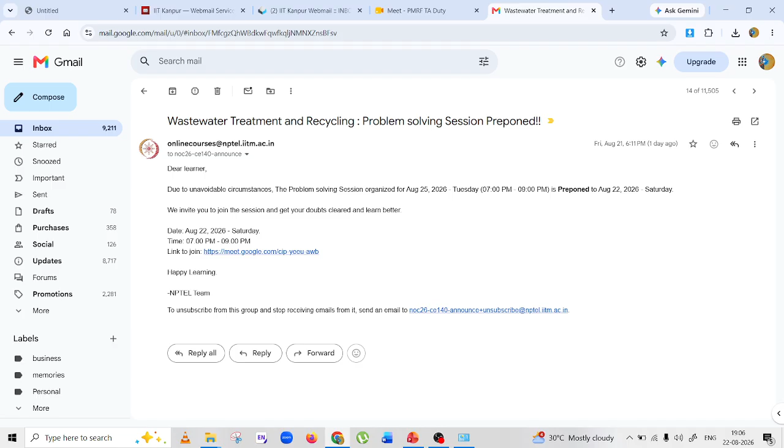Hello? Hello? Yeah, yeah, I am in the class. No, I am in the class. I am asking. There are five people, but no one is responding. I don't know why. Sorry. Just 1 minute. Oh, sorry. Just 1 minute. Oh, I was on the wrong ID. Sorry.

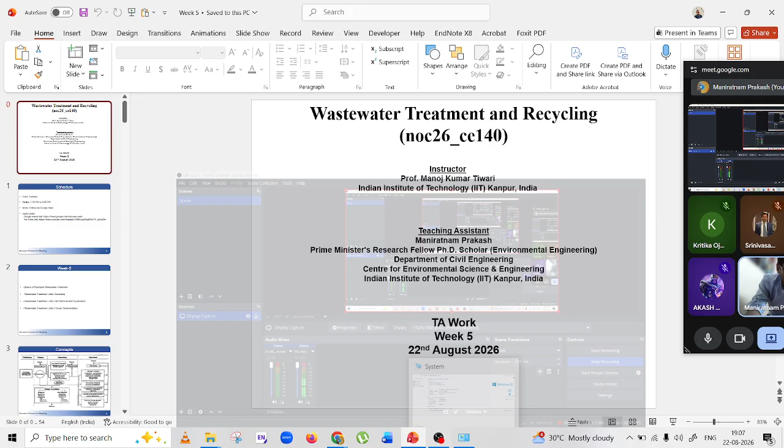Good evening, everyone. My name is Maniratnam Prakash. Welcome to the fifth session on wastewater treatment and recycling. The course instructor of this subject is Professor Manoj Kumar Tiwari.

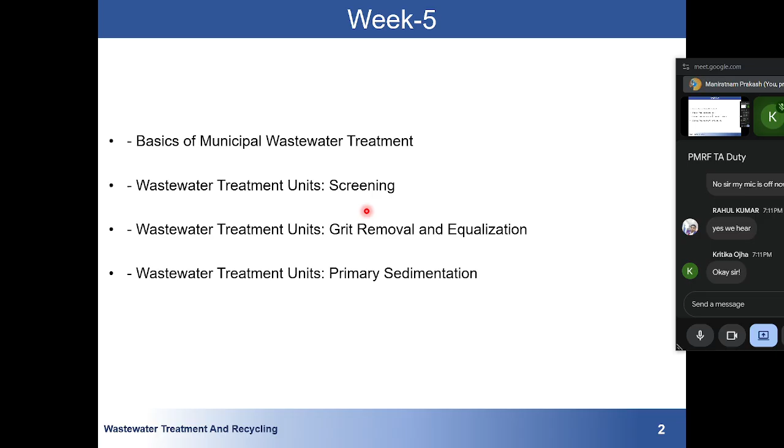So now we have some basic knowledge of what wastewater is, what kind of wastewater is generated at different locations, and what the different parameters are that we have to measure for our treatment purpose. So now we will be going into the basic treatment plant: the basic municipal wastewater treatment, then the wastewater treatment units. There are different units we will be looking into, and finally we will be looking into primary sedimentation. So this is the general treatment plan.

Okay, you can go through any book and you will find this layout of what the different treatment units are.

So first thing is that preliminary treatment. So here what we do is remove all the larger particles, because we know that our different units for treatment of wastewater have certain limitations. So the first and foremost thing they want is that there should not be any larger particles. So here we do preliminary treatment. We know that wastewater is coming from different locations, and it will contain larger rocks, boulders, or some unwanted things which are not suitable for the upcoming unit. So we have to remove it.

Then we have primary treatment unit, then secondary treatment unit, and then advanced treatment unit. Most of the treatment plants are till secondary treatment unit. Now advanced treatment unit is for some specific purpose, like if we want to treat our wastewater for drinking purpose or something else, then we go for the advanced treatment. But at most locations you will see that they go through the secondary treatment unit, and after that they discharge into a river, pond or land. We have different criteria for disposal.

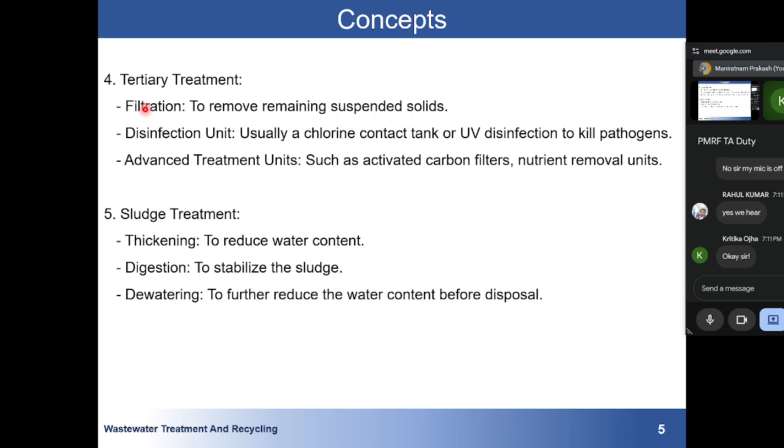We will be going through these topics in much detail in upcoming weeks, maybe week 7 or 8. We will be looking into these different treatment units, but for now I am just giving you the brief introduction of how this wastewater treatment plant works. So I think this is clear to everyone.

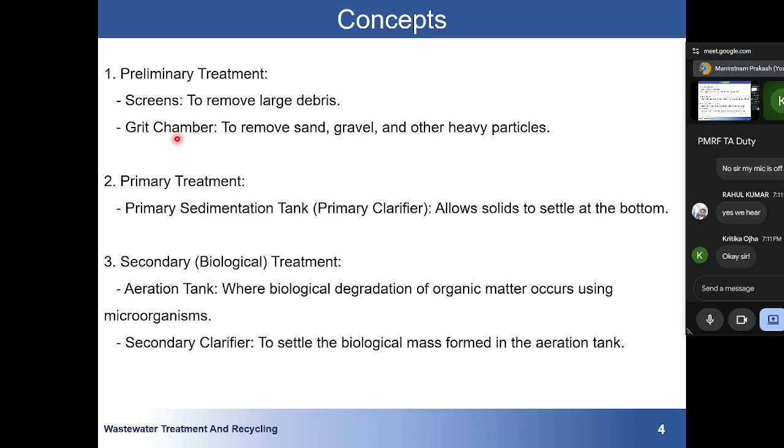So as usual, we will be going through question and answer. I will be showing some questions, and there are few people here, but I want everyone to participate, and after that we will be discussing the answer. So the first question: we have to match the treatment stages given in the first column with the target contaminants to be removed in the second column. Given the basic things we have discussed, everyone please participate and try to answer this. Please take your time. It's a very simple question.

We have got one answer, that is C. What about others, Kritika and Srinivasarao? C. Yes, C is the correct answer. Primary treatment, where we remove suspended matter. Then we have the secondary unit, where we remove dissolved organic matter, and then the tertiary unit to remove microbes, TDS, and nutrients.

Yes, this is correct. Like we have discussed, primary treatment is the first stage treatment where physical processes like screening and sedimentation are used to remove the larger particles. Then we have secondary treatment, where we remove the organic carbon, dissolved organic matter. Organic matter will mostly be in carbon and nitrogen form, so we have to remove it. This stage significantly reduces the biochemical oxygen demand and organic pollutants in the wastewater. In upcoming weeks we will also be reading how these treatment units work.

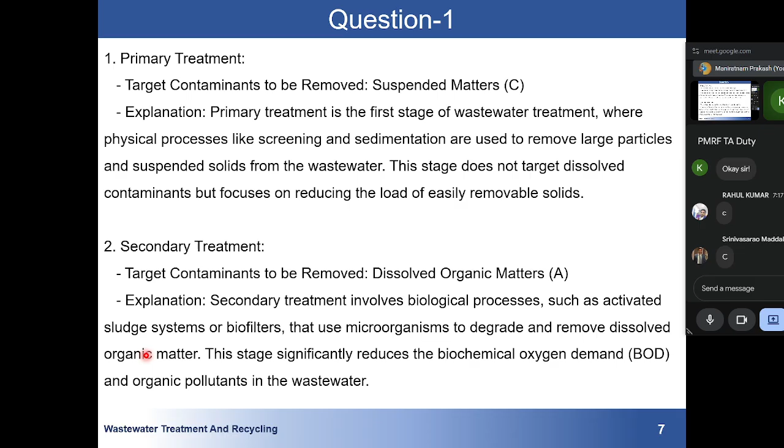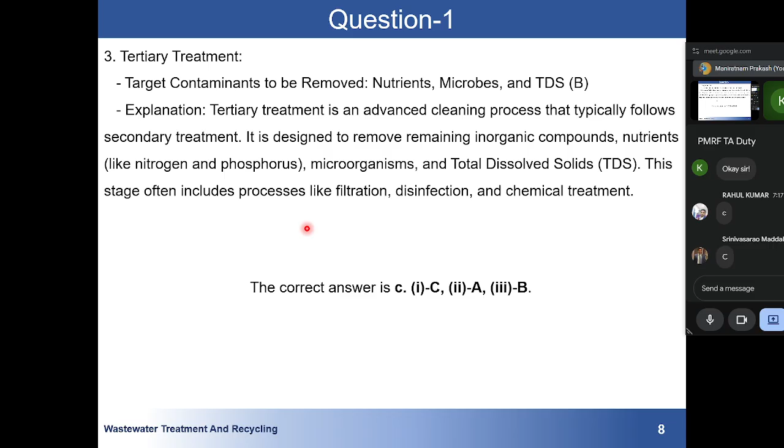Then finally we have tertiary treatment to remove nutrients and microbes. Tertiary treatment is an advanced cleaning process that typically follows secondary treatment, and it is designed to remove the remaining inorganic compounds, nutrients such as nitrogen and phosphorus, microorganisms, and total dissolved solids. This stage often includes processes like filtration, disinfection, and chemical treatment. I hope this is clear to you.

Coming to the second question: which of the given treatment stages is not included in the preliminary treatment of wastewater?

Not included. A. So oil and greases, just by skimming tanks. Okay, well, I have got one answer, A. What about others? They are asking "not part of." I don't know, just read it. Not included. Not included in the preliminary treatment.

So I don't know why you said A. B is the correct answer. Yeah, B is the correct answer. We will look at it. So the preliminary treatment of the wastewater is the first step in the treatment process, focusing on removing larger and easily separable contaminants to prevent damage or clogging of the subsequent treatment units. It typically includes the following.

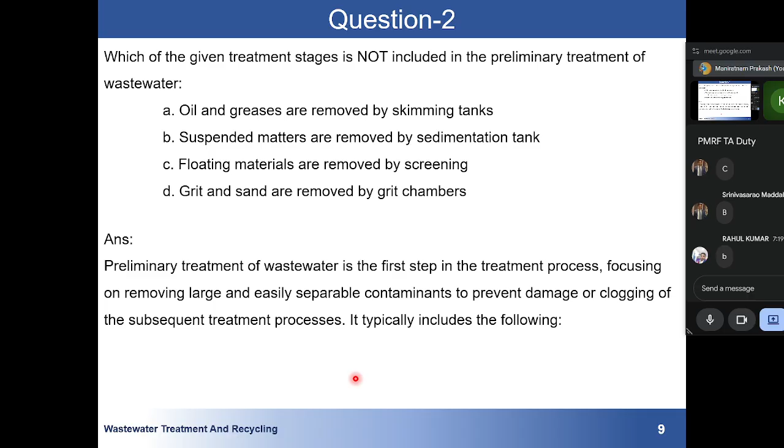So I think I have not added the part. So first, oil and grease removal is a part of it. They were asking not included in the preliminary. So oil and grease are removed in the preliminary treatment, whereas skimming tanks are there to remove oil. If you search on the internet for wastewater treatment, they will show you each and every part, like how oil is removed, how suspended matter is removed.

So there is a roller type of thing. They will remove this thing, and there is a skimming tank that removes the oil and grease also. So generally, if the wastewater coming in contains some oil, the oil will be floating on the wastewater, because due to density difference it will be lying above the water. So they remove it with the help of a skimming tank. Floating materials are removed by screening, which is a part of preliminary treatment. Grit and sand are removed by grit chambers, which are used to remove heavy inorganic particles like sand and gravel during preliminary treatment.

Secondary treatment involves the removal of finer suspended matter. So the correct answer is B. Suspended matter is removed by sedimentation. So secondary treatment involves the removal of finer suspended matter and everything. Okay, so we will be looking into what this secondary treatment unit is. But before that, coming to the third question. I hope this is clear to Kritika. You have already said okay, sir. So if anyone has any other doubt, they can ask, or let's solve the third question.

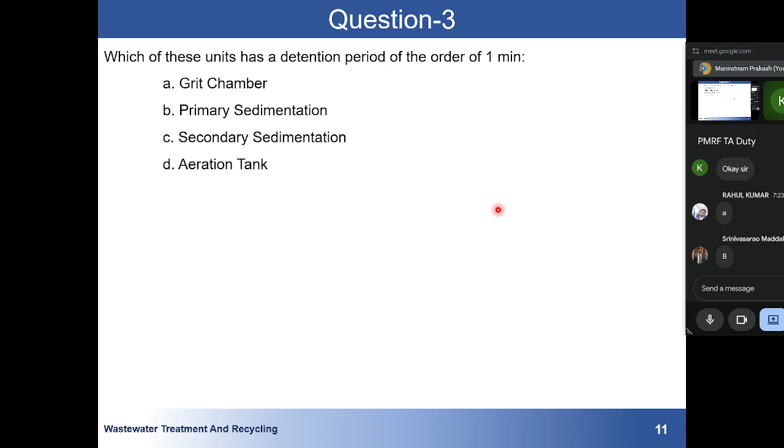You don't have to go into details. You can take some water and just keep it. It will contain some suspended particles, and we know it won't settle on its own, so we have to add some chemicals also. So it will take more than 1 minute, so B cannot be the answer. The correct answer is A, grit chamber. The detention period of the grit chamber is around 1 to 5 minutes. Grit chambers are designed to remove heavy inorganic particles like sand, gravel, or other small dense particles from the wastewater. The short detention allows these heavier particles to settle while lighter organic matter remains in suspension.

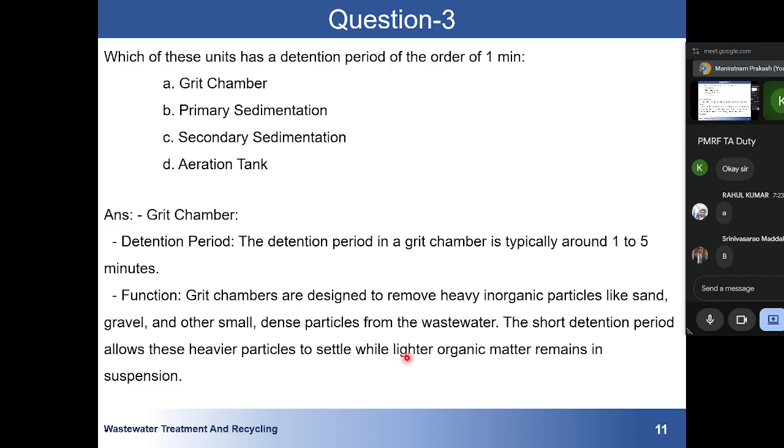So I hope this is clear to those who were saying B, primary sedimentation. Here it takes around 1.5 to 2.5 hours. The process allows suspended solids to settle because we add chemicals and many things. Then secondary sedimentation also takes around 2 to 4 hours. The process is designed to remove biological sludge solids that are formed during secondary treatment. And the aeration tank provides oxygen to your wastewater so that oxidation can happen. It usually takes 4 to 8 hours. So the correct answer is A. I hope this is clear to you.

Srinivasarao, you were saying B. I hope this is clear to you. The correct answer will be A.

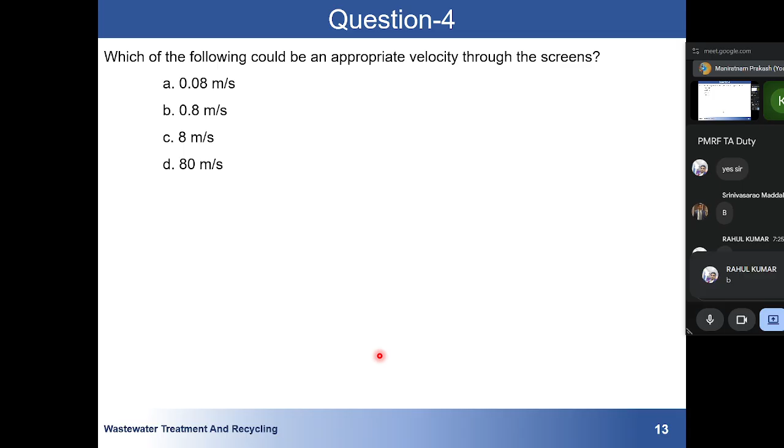Which of the following could be the appropriate velocity through the screens? This is information like, when we design our screening, we have to fix that this much velocity should be there, 0.8 meter per second. B, yeah, B is the correct answer, 0.8 meter per second.

So the appropriate velocity through the screen typically depends upon the specific application and design requirement. Based on the provided search results, the commonly accepted velocity through the screen is recommended to be around 0.8 meter per second. The value is supported by various engineering guidelines. So the purpose is that there will be a screen, a screening.

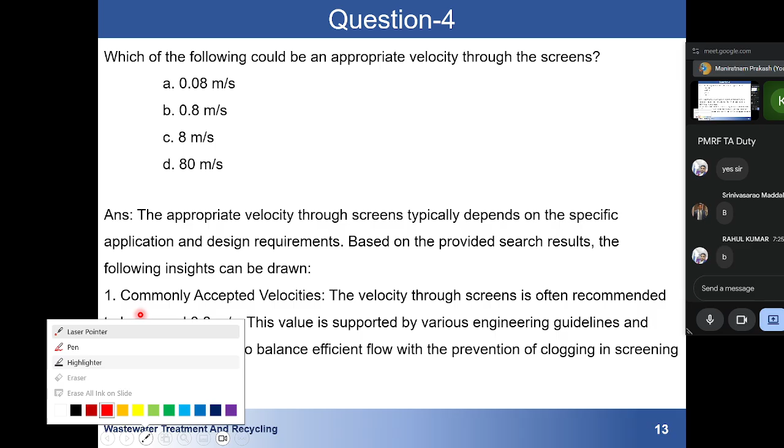So how does your screening look like? Like this. Okay, and the water flows in this direction. Okay, and what happens is that this also keeps rotating. So you will find in older versions there is manual scraping. In older wastewater treatment, you will see something like a net structure the water will be passing through.

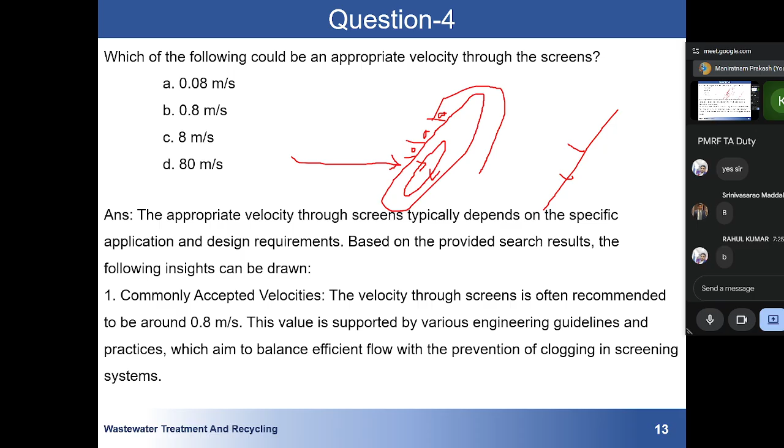But currently people are using a belt-like structure which contains a stair-like arrangement. Water will be coming, and if some debris is there, it will settle down here, and when it comes to this side, it will be thrown and collected at some point, and the water will pass. So this arrangement is made. I hope everyone has seen how a screen chamber looks.

There is also a concept of self cleansing; a self cleansing velocity is important to prevent sedimentation. The minimum recommended effective self cleansing velocity is generally 0.3 to 0.8 meter per second. Values above this help the solids not settle down. So we also maintain this.

If the velocity is very low, suspended solids will start depositing on the bed of the unit and it will clog. If the water is moving in this direction, we want all the suspended particles to also move in this direction. If the velocity is very high, there might be chances that the larger particles will keep flowing with it. Okay, I hope this was clear to you.

Coming to the next question, question number 5, the equalization tank. Answer this question. We have got one answer, D. Question number 5, answer is D, all of the above. Everyone is saying yeah, it's correct. The correct answer is D. An equalization tank is typically a storage tank. I hope everyone understands.

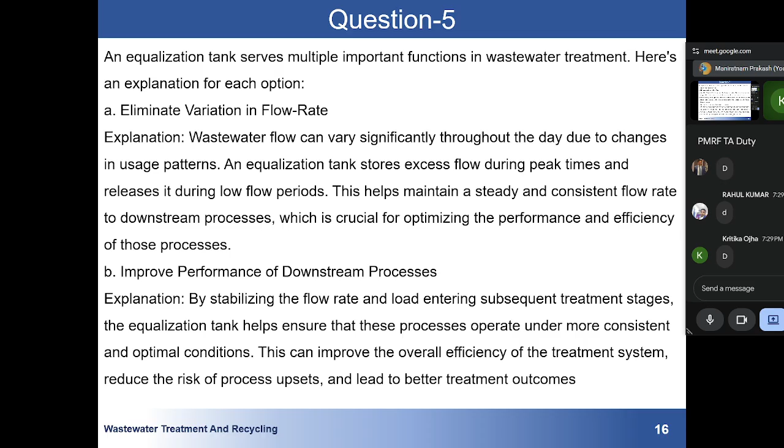And last, fluctuating concentration. The concentration of pollutants in the wastewater can fluctuate due to varying sources, and the equalization tank mixes the influent to average out this fluctuation, providing a uniform composition. So suppose one water contains a very high amount of BOD, another contains a small amount of BOD. In the equalization tank, everything will mix and we will get an equilibrium BOD. That will help us to design our treatment unit. I hope this is clear to you.

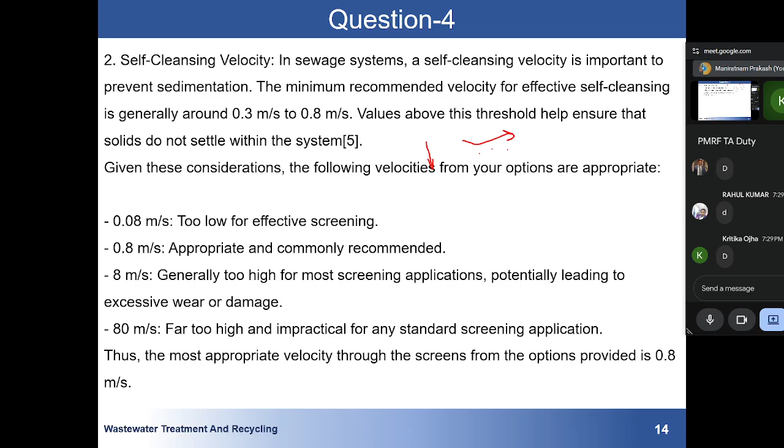Sir, equalization tank, where is it located, sir? Is it prior to the grit chamber, or where is it located exactly? Just 1 minute. This I think I am also not aware, but let me check. I think it will be written here.

So generally it is after this, between preliminary treatment and primary treatment. Now it also depends upon the design, how someone has designed it. But in general, I have just searched on the internet. First they remove all the larger particles and boulders in the screening and grit chamber. Then the water will go through the equalization tank. So it is here, after the screening. So here you will get this equalization tank.

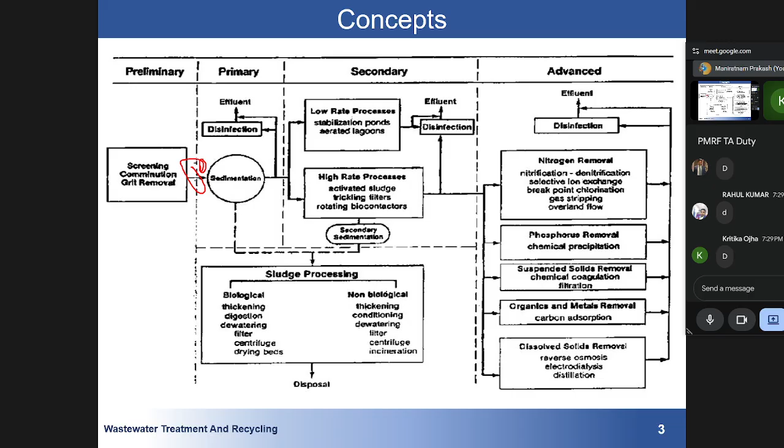I think I have a diagram also. Just 1 minute. So here you can see this is our primary treatment unit. Before that we will have the equalization tank. Here the water will be coming at a uniform flow rate and it will go to this tank. I hope this is clear to you. Okay, sir.

So the correct answer was D. Now before going to the next question, I want to discuss something about sedimentation. I will take around 5 to 10 minutes to discuss the terms and some formulas that people generally use, and we will be using these formulas to solve some upcoming questions.

In general, sedimentation is the process in which suspended solids are allowed to settle naturally by the action of gravity. There will be no pressure or anything, just water, and it will settle down just by the action of gravity. That is known as sedimentation. There are different types of sedimentation: type 1 settling, type 2 settling, type 3 settling.

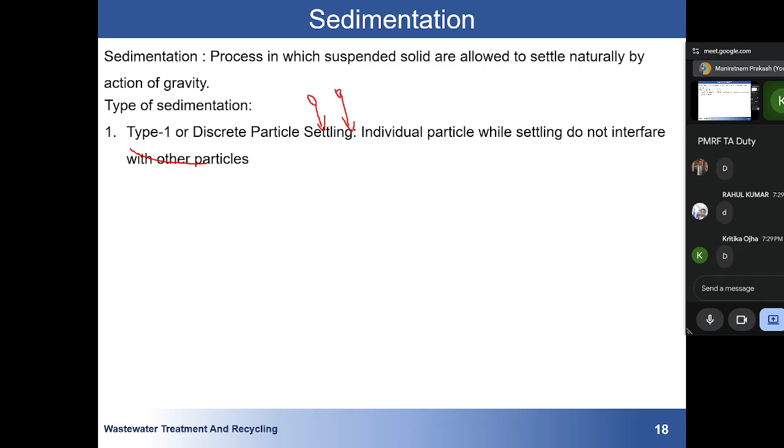Type 1 settling is where individual particles while settling do not interfere with other particles. If you take water and see one particle settling and another particle settling, they are not interfering with each other. Each will settle on its own, not disturbing anyone. This is known as type 1 or discrete particle settling. The most common ones people generally use are type 1 and type 2. Now if we talk about the second, type 2.

Enhanced settling involves adding chemicals like coagulants and flocculants to promote the aggregation of particles into larger flocs. These larger particles settle more rapidly than the individual small particles, improving the efficiency of the settling process. Imagine that in your water some larger particles have settled. Now there are smaller particles which won't settle on their own, but you have added chemicals known as coagulants or flocculants. There will be a change in chemistry, and these will combine together to form a larger particle.

And by that, if they have formed the larger particles, they will have some weight, and by the action of gravity they will settle. So that's why it is known as type 2 settling.

Then we have another process, that is hindered settling, or type 3 or zone settling. Hindered settling, in which the particles in the group slow each other down as they fall through a liquid, making the process of settling take longer than it would if the particle were alone. So it's like particles in a group slow each other.

The name itself suggests that initially you will see that there is settling, but after some time you will see that the settling has not stopped, but it has slowed down. So that is known as hindered settling.

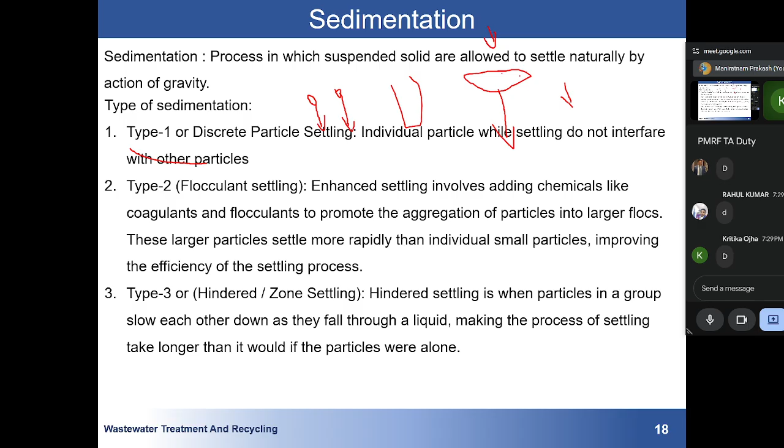And finally, type 4 is the compression settling, the mechanism of settling by forcing out the water from the solid due to the compressive force of solid on the top. So imagine that in your particles you will have larger particles and smaller solid particles.

So when it is coming down, it will also be compressing the smaller particles, and overall they will settle as one after some time. So this is known as type 4 settling. Each settling happens at a different unit we will be looking at.

First you should know the definition. Second, you should know where each type of settling happens: type 1, type 2, type 3, and type 4. Type 1, which I will discuss in the upcoming slide, happens in the sedimentation tank. Type 2 happens in the coagulation tank.

Type 3 and 4 happen during advanced treatment units, when we are generally doing the organic treatment. I have some doubt with 3, but type 4 I am sure happens when we do biological treatment. I hope this slide was clear and everyone will remember this. This is a very general question that people ask in Viva.

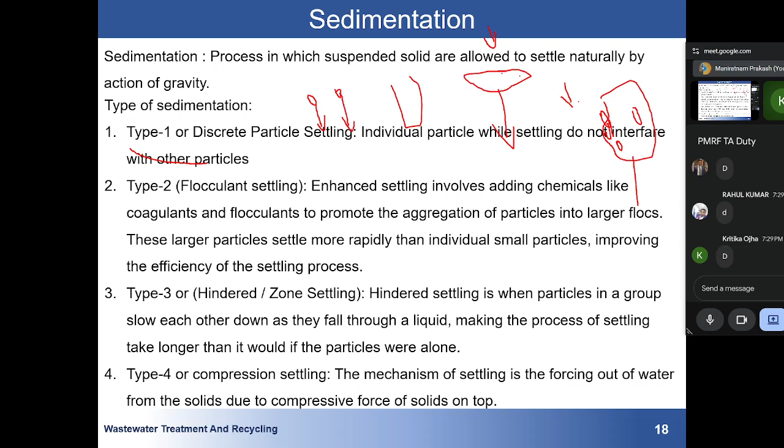Now I'm coming to the important part: settling velocity. When we talk about settling velocity, we are generally talking about type 1 settling. I have not written it, but assume this is for type 1 settling. Here we have taken one discrete particle and have not considered other particles.

Imagine that there is a particle in your water flowing with some velocity. It will have its own weight, W. Then it will have some buoyancy force, and as it is falling, it will have some drag force due to the water. I hope this is clear to you.

The weight of the particle will be volume into its density. We know that density is mass by volume. The assumption, which I have not written here, is that we consider the particle as spherical, of uniform weight, and not hindered by other particles. You can read this in the PPT or any book.

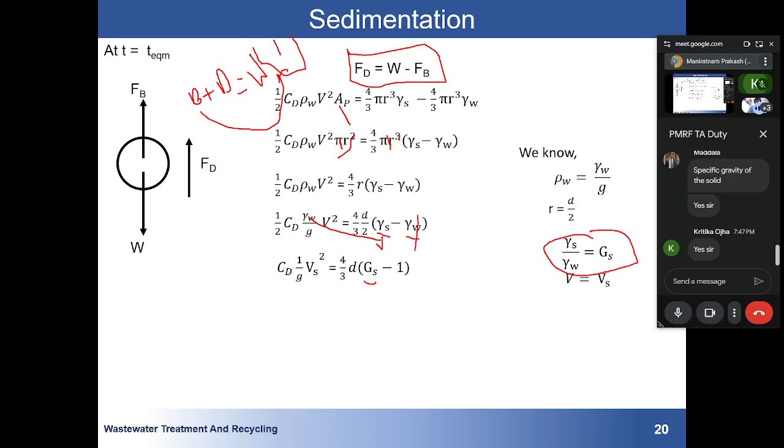So now what we have done is we have taken out this gamma w on this side. So this will be converting into one, and this gamma s by gamma w we can write as Gs. And we also know that the velocity at which it is coming down will be the settling velocity, that is Vs. So now we have put down each value.

Now we will take g to this side, we will take CD at the bottom, then finally the settling velocity formula we will get is 4 by 3 into g into d into Gs minus 1 by CD. So this is like a general formula.

If you are in your BTech or somewhere, this derivation will be asked of you. And if you are appearing for some written examination, there also they will ask this derivation. Anyone can ask. So now we know that Vs is equal to 4 by 3 into gd into Gs minus 1.

So now there is a concept that the flow of the water in which the settling happens can be of very different types. It can be laminar flow, it can be faster flow, which is known as transition flow, and then we have turbulent flow. So depending upon the type, we have something called Reynolds number.

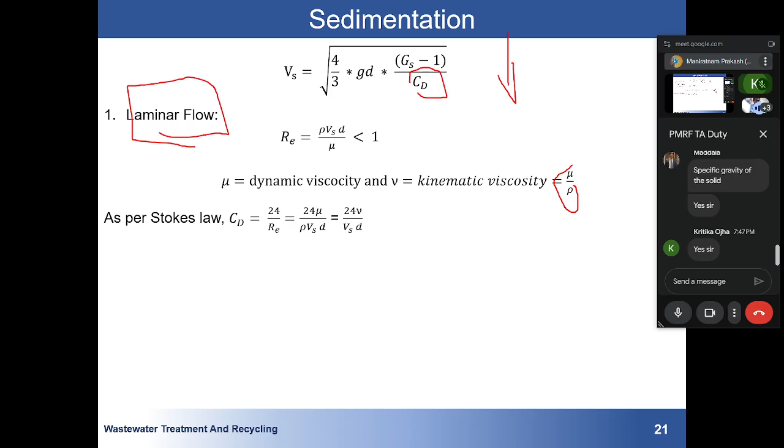Now, you won't be given the velocity, you will calculate it using this formula. Let me derive first, then I will tell you why it is important. Just remember this, the formula of Cd depends upon the type of flow. Suppose if your flow is laminar flow, then Cd is defined as 24 by Reynolds number.

And we know that Re is equal to rho Vs d by mu. So this is mu, and you can either represent it in the dynamic viscosity or you can represent it in the kinematic viscosity. So what will happen is that we will be putting this value of Cd here, 24 by Re.

If you derive it, you will get Vs is equal to g d square into (Gs minus 1). You don't have to memorize it, but you should know how to derive it. If you are preparing for GATE examination, you should memorize this formula: when the condition is laminar flow, the velocity formula is g d square into (Gs minus 1) divided by 18 into kinematic viscosity. I think it is nu.

Okay. Is this clear to you? So this was laminar flow, when the Reynolds number is less than one. But now imagine a transition flow, where the Reynolds number is greater than or equal to one and less than 1,000, then you have to use this formula.

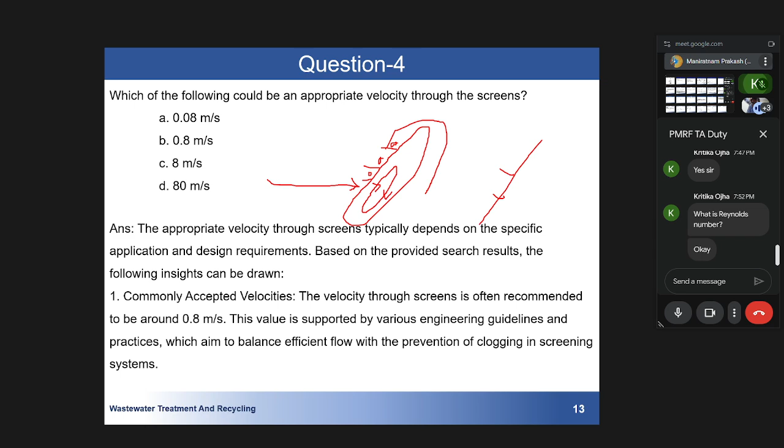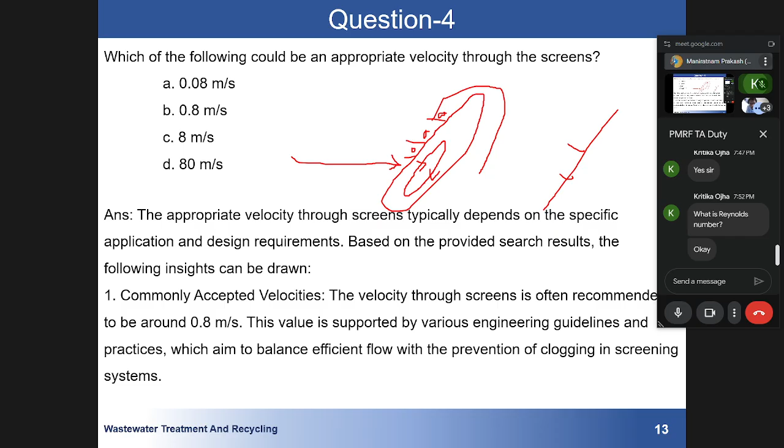This also helps us to define our self-cleansing velocity, and it is generally 0.8. There was one question about what should be the minimum velocity; 0.8 meter per second we discussed. So this velocity was determined by using that formula only. This formula helps us make sure that whatever suspended particle is there keeps moving and only settles at its designated place. Generally if you solve any question, this value will be given to you.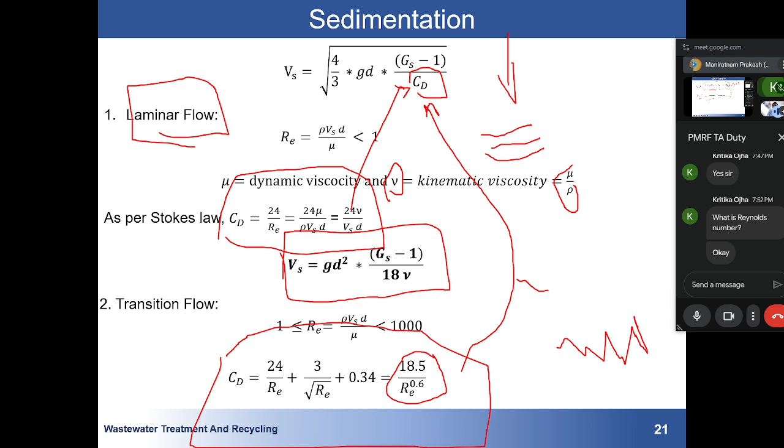But in general, G is taken as 2.65, capital G, that is the specific gravity of the particle. Then acceleration due to gravity is 9.8, and rho p or rho w, from here we can identify. And the viscosity, remember, this is kinematic viscosity. Do not get confused. Dynamic viscosity and kinematic viscosity both have different units. So remember the unit of this viscosity.

1.01. I think in 2021 when I was appearing in the GATE examination, or somewhere, they asked the unit of this kinematic viscosity or dynamic viscosity. So everyone, please make sure that you know the unit. If somebody is appearing for GATE or JAM, this kind of question is generally asked. So I hope this is clear to you.

Any doubt here? Whatever derivation, I have tried my best to explain in a very simple way, and I hope you have understood it. If anyone has any doubt. What sort of questions? October 18th, there is an online exam, sir. What sort of questions will be coming?

So every year the practice is that they ask similar types of questions to those in your assignment. There will be some theoretical questions and some numerical questions. In theoretical questions you will have multiple choice or single choice questions, and in numerical questions generally you have to fill something in. There will be some sets of questions with a single 2-3 liner question, and then you have to answer 4-5 questions depending upon the given information.

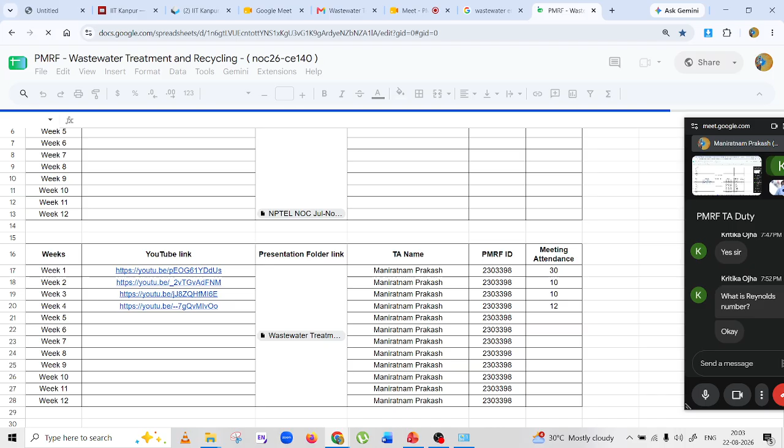Why it's not opening? Just 1 minute.

For practice purpose, you can go through that book, and I'm also showing you two more books. I have uploaded the PDF of that book in my folder.

I don't know why. Oh, somehow my laptop has gotten bad. I don't know what's happening for the last 2 days.

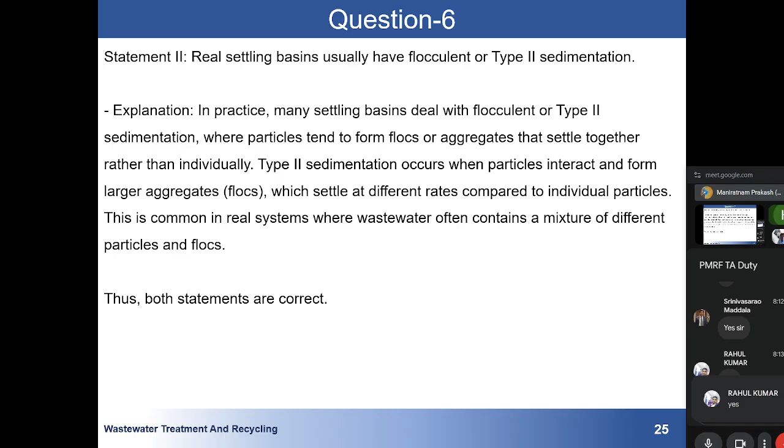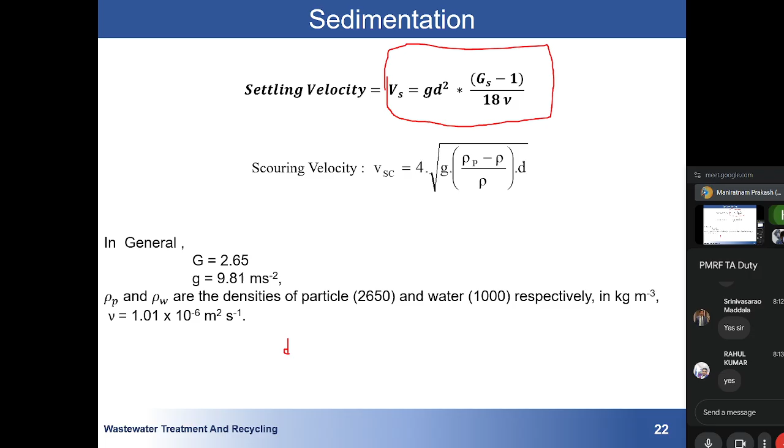So they will give you this information: capital G, small g, and then viscosity, everything will be given to you. Then you will be asked to find out the settling velocity. Density will also be given, and the diameter of the particle. So you will find out the settling velocity. Now, if you have used this formula, you have assumed that your flow was laminar flow. So whatever Vs you have got, you have to put it.

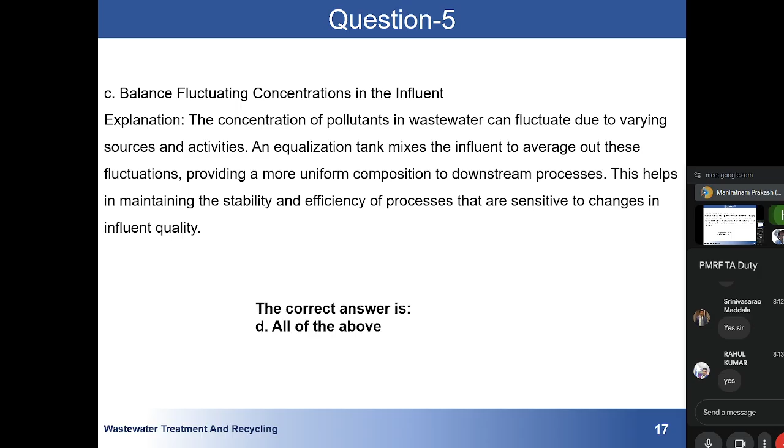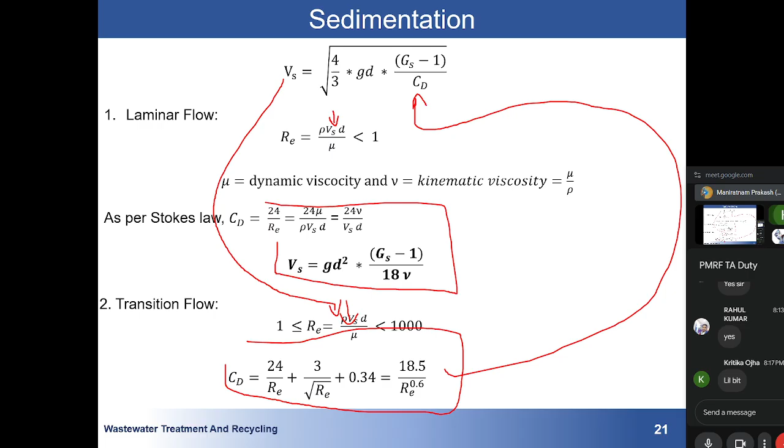I don't know whether I have a question or not, but I will try to get some. I will show you something at the end of the session. I hope others just hold on for a few minutes. I think I have some question. We will solve it, and then I think you will understand what I was saying. I think others have understood.

Now coming to question number 7, settling velocity under flocculent settling is. Just answer this question. Will it be higher or lower than discrete settling? We know that Vs is discrete settling, that is settling due to gravity. All settling is due to gravity only, but here we are using chemicals, so whatever small particles have been there, they have formed a larger one.

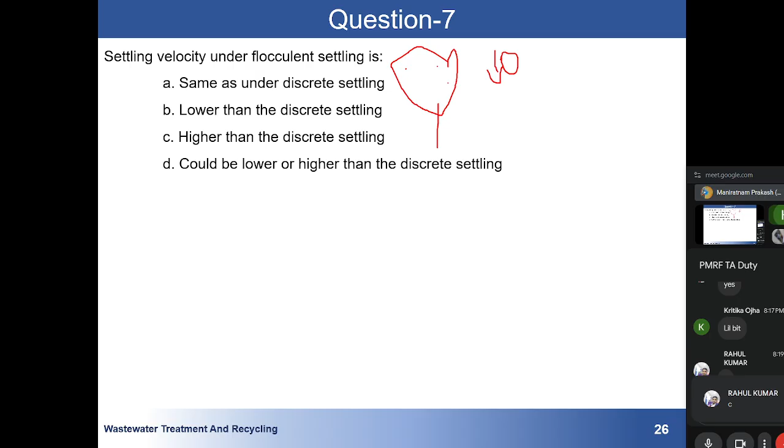So can you say its velocity will be larger, it will be the same as that single particle, or it will be higher than discrete settling, or lower than discrete settling? Very simple. Anyone? Higher, lower, same, or could be anything. C, higher than the discrete settling. Yes, correct answer is C.

In flocculent settling, the particles form flocs that typically have a higher settling velocity than their individual discrete particles. This is because of increased mass and faster settling rate. So under flocculent settling, the settling velocity is generally higher than discrete particle settling or type 1 settling. I hope this is clear to you, those who haven't answered it.

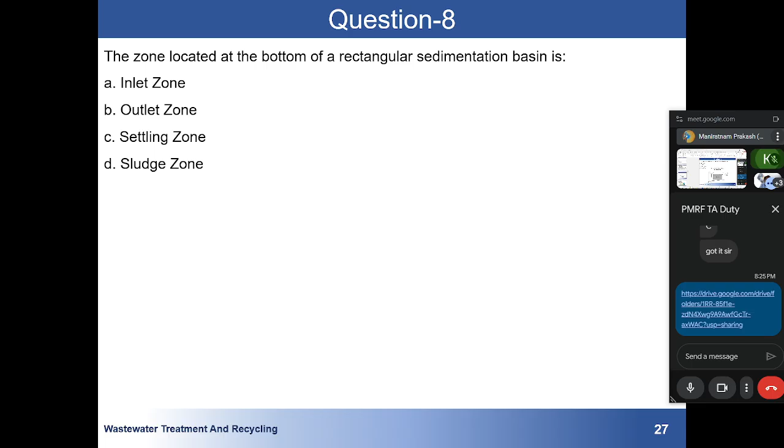Okay, what about Rahul Kumar? What are you doing? Are you a student or also working somewhere? A student, sir. From where? Patna, Bihar. And what about Kritika Ojha? Sir, I'm preparing for the state PCS sanitary waste management exam, which has a unit on wastewater treatment. You are also from Bihar? No, Jharkhand. Was this exam cancelled? Yes, sir. In April they took the exam, but it got cancelled because the paper leaked. I scored good marks in that. Okay, all the best for your examination.

Thank you, sir. Okay, so now coming to question number 9. Everyone, please try to answer it. A, lesser area but higher energy input. No. This question was directly from your slide.

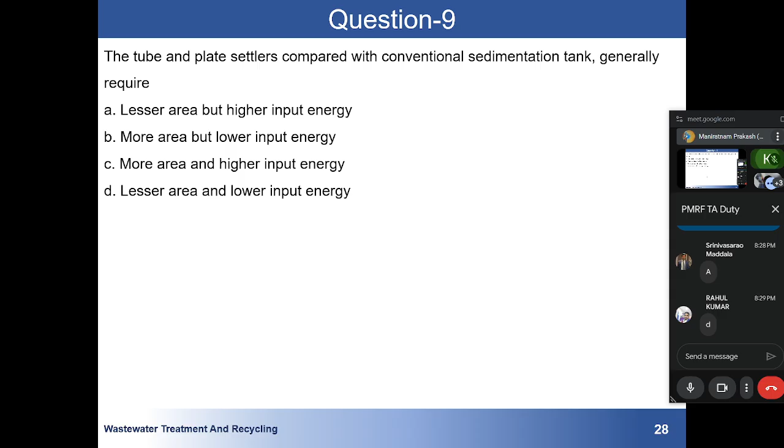Here the area is decreased. You can see the third point: these are compact units and therefore usually require only 65 to 80% of the area of the conventional clarifier, and the energy inputs are lower due to absence of mechanical or moving parts. So the correct answer will be D, lesser area and lower input energy. There are other problems like clogging, but in terms of area and input energy, it will be lower.

Now moving forward, there is one numerical question. First let me know how many of you know about surface loading rate. What is the formula of surface loading rate? If you know, try to solve it. If you don't know, we will be solving it. Take your time. Else, just let me know, and we will be moving forward.

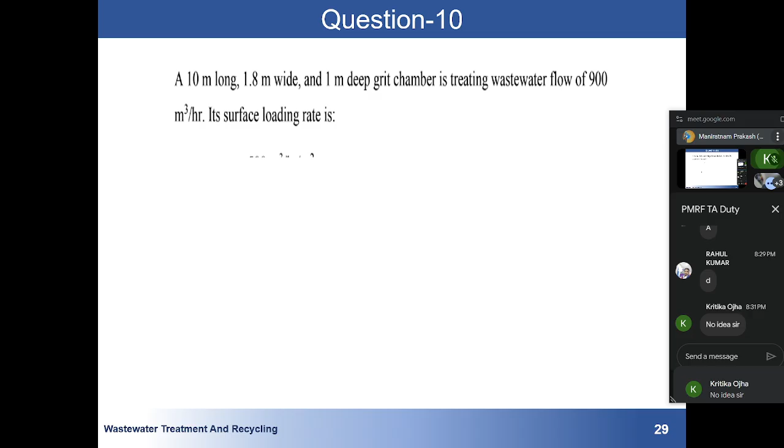Pressure. Okay. So remember this surface loading rate is defined. This is the final formula. This is final: surface loading rate is flow divided by length into breadth. So this was our sedimentation tank. This will have length and this depth. And there is a width also. So it will be like this.

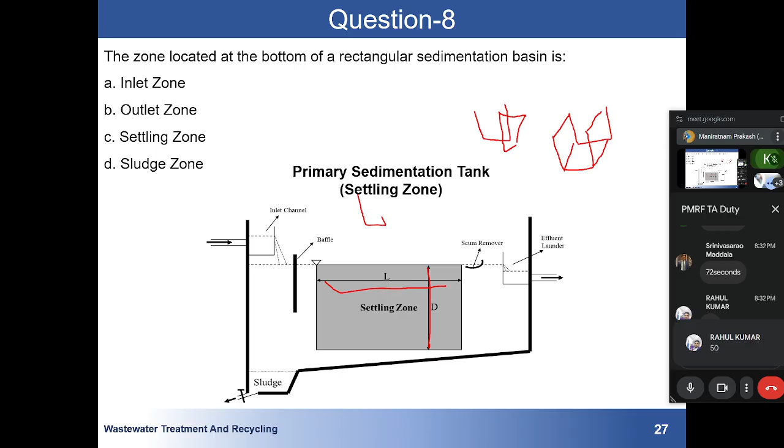If we look into the 3D, it will be looking something like that. Not a good picture. Yeah, 72 second. It's asking about loading rate. So loading rate won't be in seconds. It will be like meter per something. Yeah, 50 is the correct answer.

But remember, if you are regular to my class, I always ask to write the unit. Just remember the picture that I was showing you of the sedimentation tank. There we have detention time, which is the average time for which water stays in the tank, and that is given by V by Q, where V is the volume of tank and Q is the flow rate. And the surface overflow rate, or loading rate, is given by Q by As, where As is the surface area of the tank.

So for a rectangular tank of length L, width B, and depth D, SLR will be given by Q divided by L into B. So I hope this is clear to you. And using this formula, you can also find out the detention time V by Q. V is equal to L into B into D divided by Q. What I have written here, D by Vs. What is D by Vs?

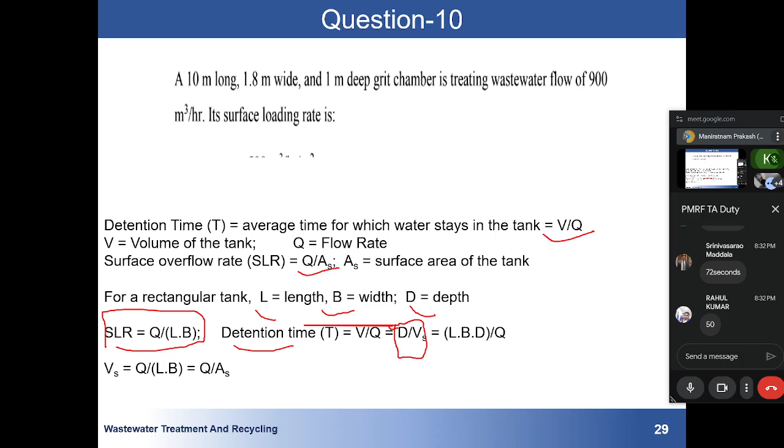Apparently, I'm not able to share the screen. Are you able to figure out what I have written here? Okay. So I will try to write here. So this, we know that. Just 1 minute. Listen. There is no problem in audio and everything.

So we know that volume will be given by L into B into D. And this Q. What is Q? This Q will be settling velocity into area; area into velocity is known as Q. L into B. What is L into B? L into B is area.

So what is detention time? Detention time is equal to V upon Q. Now if we put V here, V was L B D. And Q is Vs into LB. So this LB will get cancelled out, and detention time is equal to D by Vs. This is the thing which we have written. Actually it should have been written here, but I hope you have got this.

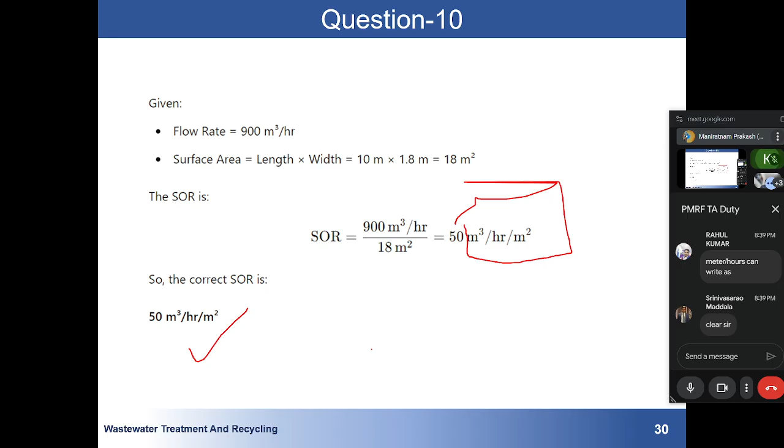Question number 11. Surface loading rate is this thing. Approximately what percentage of particles that have settled will have a velocity 0.006? Again, if you have gone through the lecture, this was discussed, but we have only 20 minutes. There are a few things left, so I will be going.

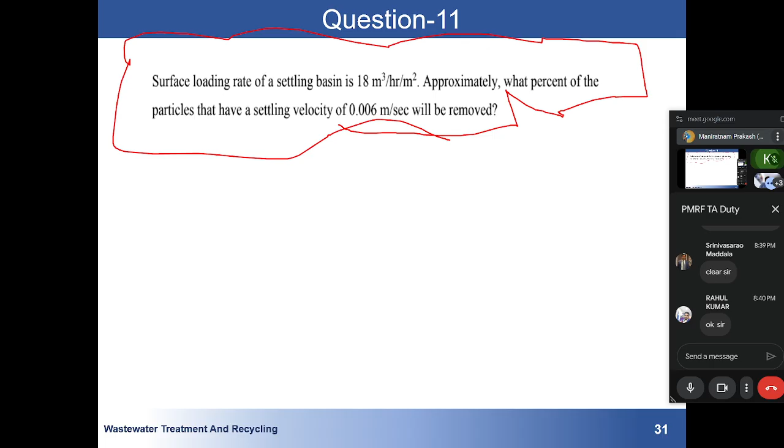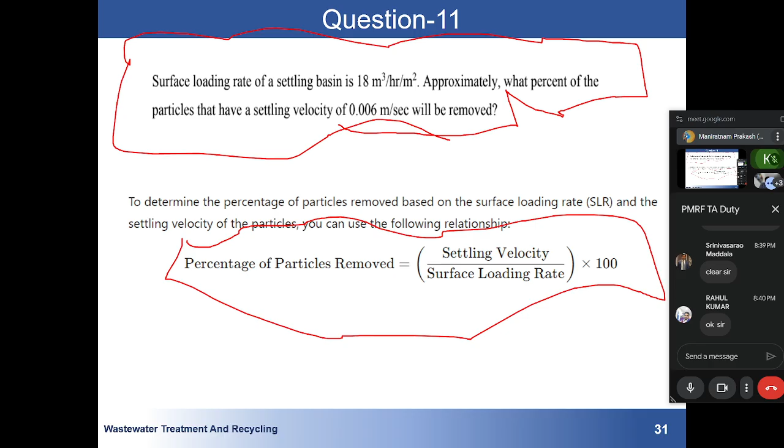Okay. So remember the formula: the percentage of particles settled is settling velocity divided by surface loading rate. Now, surface loading rate is 18 meter cube per hour per meter square, into 100. This is the percentage of particles removed. Okay? Remember this formula. So the settling velocity is already given as 0.006 meter per second.

So now you can ask me that in the last question I said do not write it in meter per second, but here I have to compare SLR with something. That's why I have converted this unit into meter per second. If you convert 18 meter cube per hour per meter square into meter per second, it comes out to be 0.005 meter per second.

So the percentage of particles will be around 120%. Since the calculated value exceeds 100%, it means all the particles with a settling velocity of 0.006 meter per second or higher will be completely removed. Thus the correct answer is 100%. Did you get it?

So see, surface loading rate is just representing at what flow rate on a particular sedimentation tank, and it is just showing at what speed a particular particle will settle. And we know from the settling velocity formula that each particle has a certain velocity, and if that velocity is there, it will definitely settle.

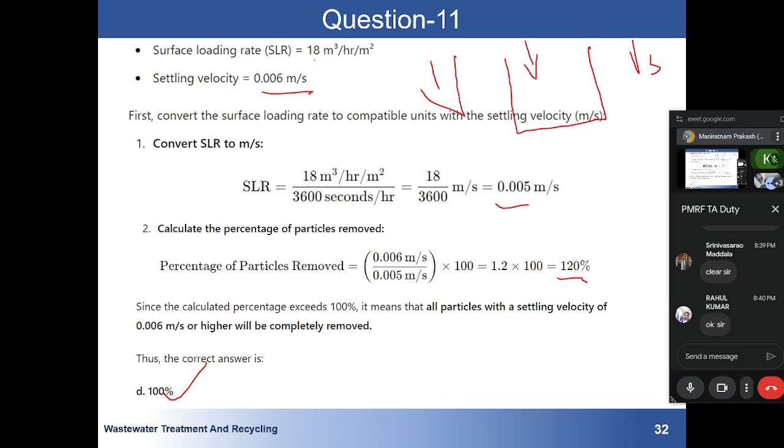I want everyone to solve the next question. I have derived it. If you have gone through the formula; if you have not taken down the formula, then that is another thing. But please solve it.

Take four. First of all, let me know: are you solving? So I won't waste time. We have only 15 minutes, so I won't stop. I will keep teaching. So tell me, are you solving it or not? If I don't get any response, I will continue with the solution. D, trying to solve. Okay. Trying to solve, then take your time.

D means 0.009. So I hope you have done that. I told you to check whether whatever VS you have got corresponds to the assumption that you have made. If you have applied the formula (GS minus 1) divided by 18 mu into something, then you have assumed that your flow is laminar. So if you have used that assumption, make sure that you calculate your RE, and make sure that your RE is less than 1.

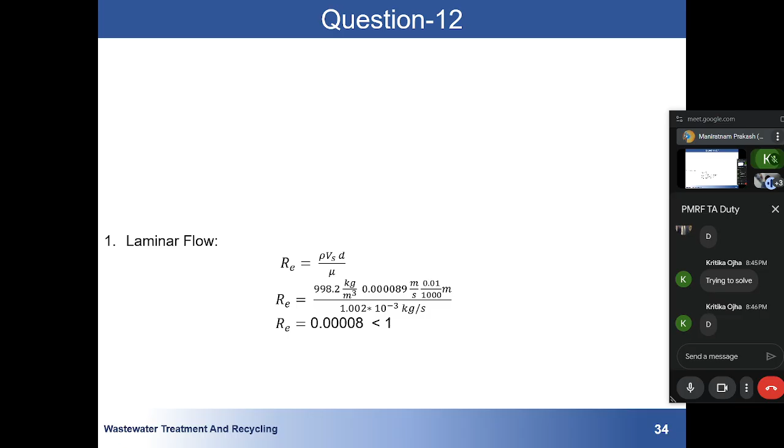See, when I'm teaching this, I'm assuming that everyone is giving a written exam. But if you are preparing for the GATE examination, you don't have to write in detail. Okay, so this is rho Vs upon this. If we keep this value, then we will get Vs as this.

Now, in the question, the density of the water is given as 998 kg per meter cube. g we know is 9.8. Then the diameter was given as 0.01 mm. Remember, I have written the unit of each and everything. I ask everyone to practice this: whenever you calculate, write your units. Then Gs is unitless, that is 2.65, minus, over 18 mu.

Now the unit which was given to us was newton second per meter square. So you can convert that. We know newton is force. And what is force? Force is mass into acceleration, so newton is kg into meter per second square.

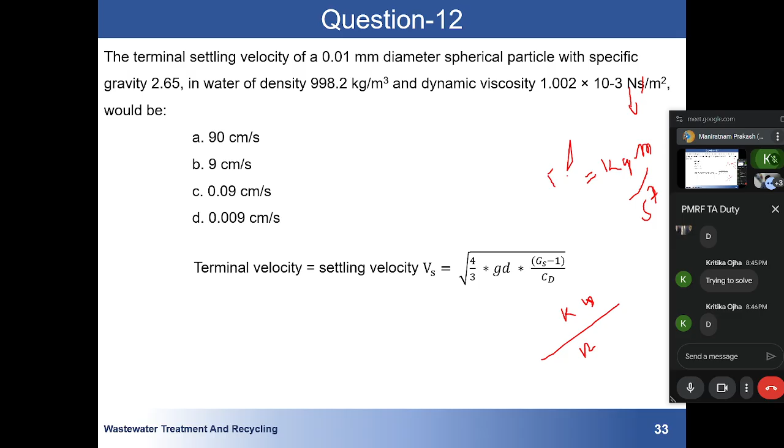So instead of newton, you can write kg meter per second square. Then this s will get cancelled and you will get a single s. So the final unit will be kg divided by meter second. Remember, this is the unit of dynamic viscosity. So the final unit is kg per meter second, which I have written here.

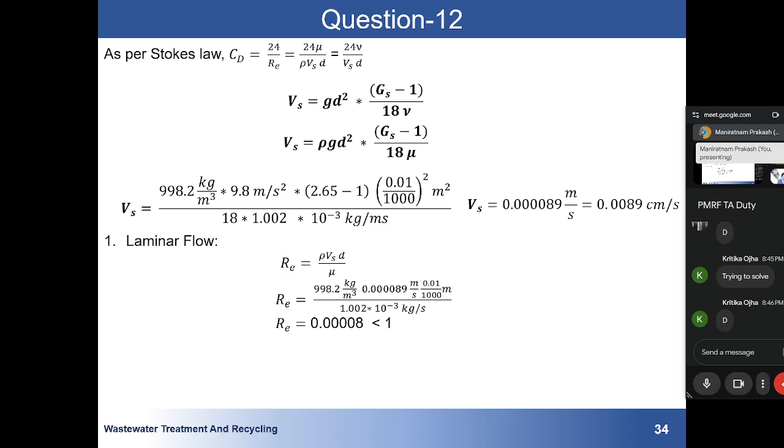I have put all the values and calculated Vs as 0.000089 meter per second, and if we convert it to centimeter, it will be 0.0089 centimeter per second. Since I assumed laminar flow, I calculated Re. I should have written that the Reynolds number is lower than 1. Let me correct it. This is lower than 1, hence our assumption was correct. The final answer is settling velocity Vs equal to 0.009.

So this is what I was explaining. Kritika, you said you understood a little bit. Whenever you calculate Vs using this formula, you should check it. Suppose instead of this you got Re equal to 8, then you won't report your answer as Vs equal to 0.009 centimeter. You have to recalculate it using the transition flow formula. I hope this is clear now.

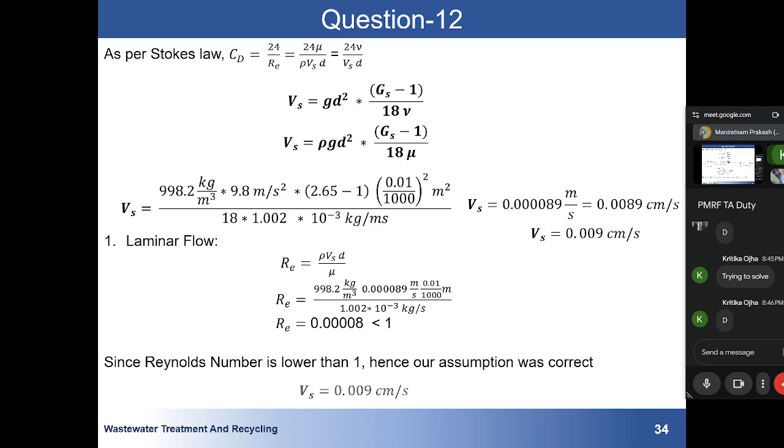Okay. Now coming to question number 13. A circular primary clarifier is designed for an overflow rate of 40 meter per day to treat this many meter cube of water. Find the approximate diameter. This is a very easy question. This is overflow rate, or surface loading rate. They have written the unit as 40 meter per day; some books use it this way.

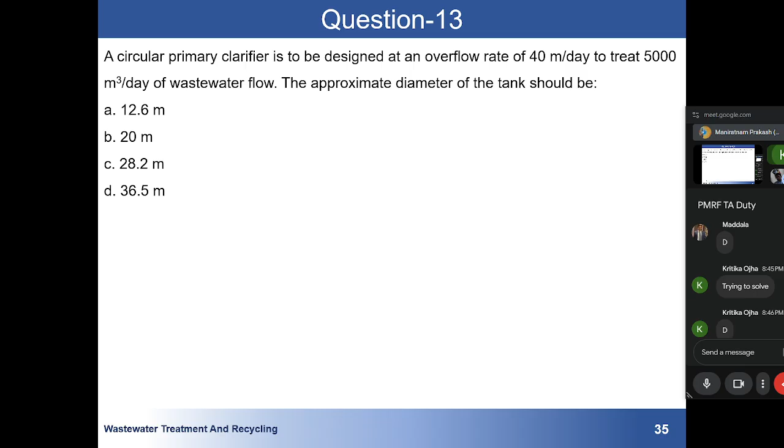Okay, so try to solve this question. Surface overflow rate is given by flow rate divided by surface area. If it is circular, the surface area is pi r square. We have only 8 minutes, so I will go through. The flow rate is 5,000 meter cube per day, the overflow rate is 40 meter per day, and the area is pi d square by 4. If you solve for d, you get 12.62.

What was the correct answer? Someone said D. Oh no, sorry. A is the correct answer, 12.62 meter. I hope this is clear to you.

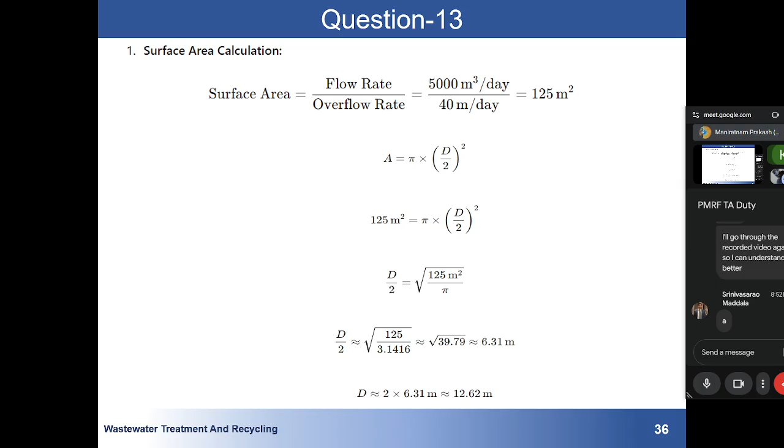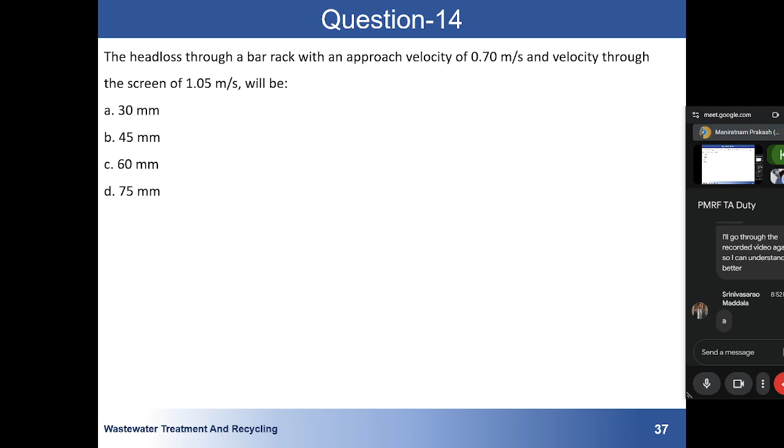If not, here we know that this is the incoming velocity, this is the outgoing velocity, so there is a head loss. Head loss is given by k divided by 2g times outgoing velocity minus incoming velocity, and generally k by 2g is given by this value, 0.0729. These are theoretical values. You should remember it if you are an expert in wastewater.

Okay, so I will be putting this value here and the final answer, head loss, will come out to be 45 mm. So the correct answer would be B. Was this clear to you? So this was all based on your formula. I hope this is clear to you.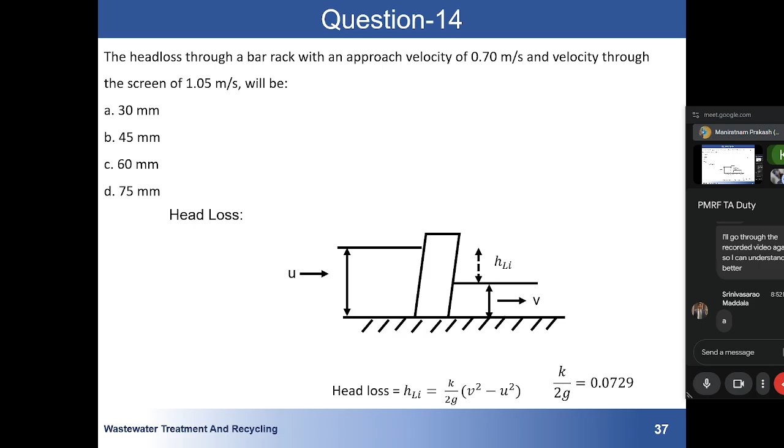This is the most simple one, 12 meter. Yes, sir. This was direct. For finding length you don't have to think about the flow rate and everything. To determine the length of the chamber, imagine that this is our grit chamber. So detention time. So what will this grit chamber do? Water will be flowing out. All the larger

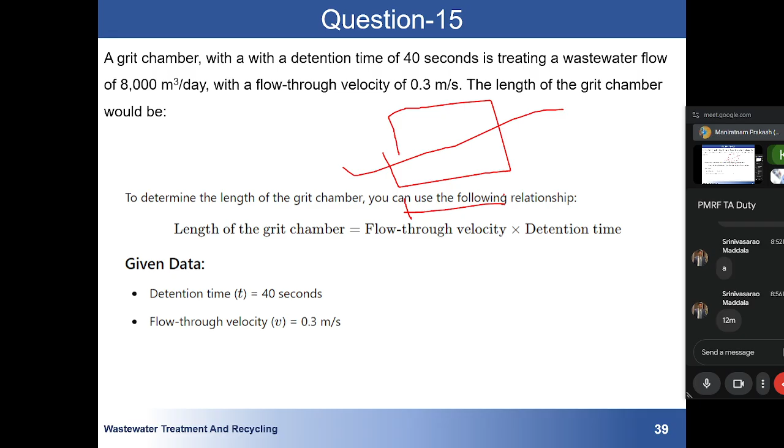particles will settle here. So whatever will be the flow through velocity and whatever time it is taking, you just have to multiply it and that will give you the length. So flow through velocity into detention time, 40 seconds, 0.3. If you put all the things, you will get 12 meters. So the length of this chamber will be 12 meter. Okay.

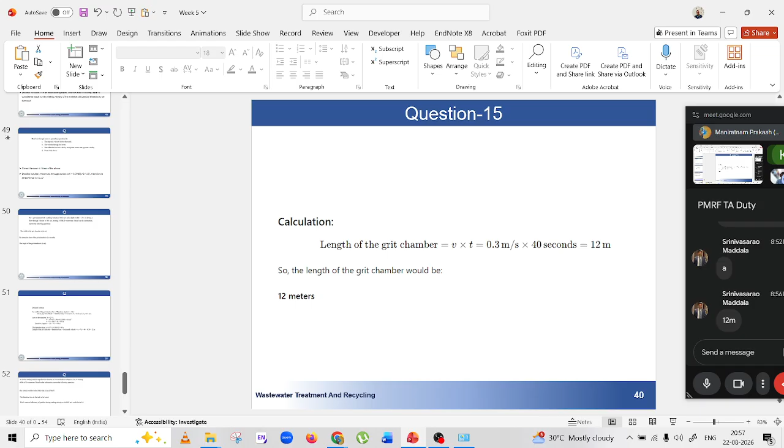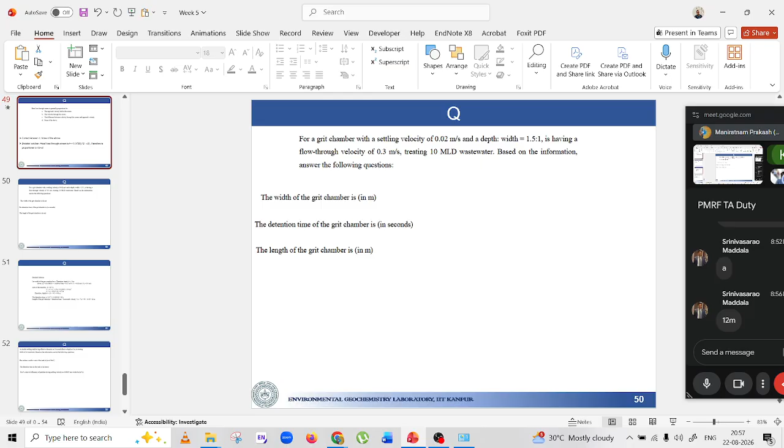There are more questions, but I don't think I have time to discuss them. But these PPTs are available on that link. There are 12 more questions with around 5 or 6 numerical questions. I think there will be some repetitive questions also, like this one. So you can go through these and you can try to solve them.

So I hope I have covered everything. Anyone have any doubt? Go through the IIT lecture which I have shared with you. But remember, if you are preparing for an examination like Ritika, Rahul, don't go as of now. If you want to understand in a better way, you are always welcome. But for Srinivas Rao, if you are looking into the basic understanding of wastewater treatment, you should go through that lecture. For others, focus on your examination. I think the most important thing for you will be previous year GATE.